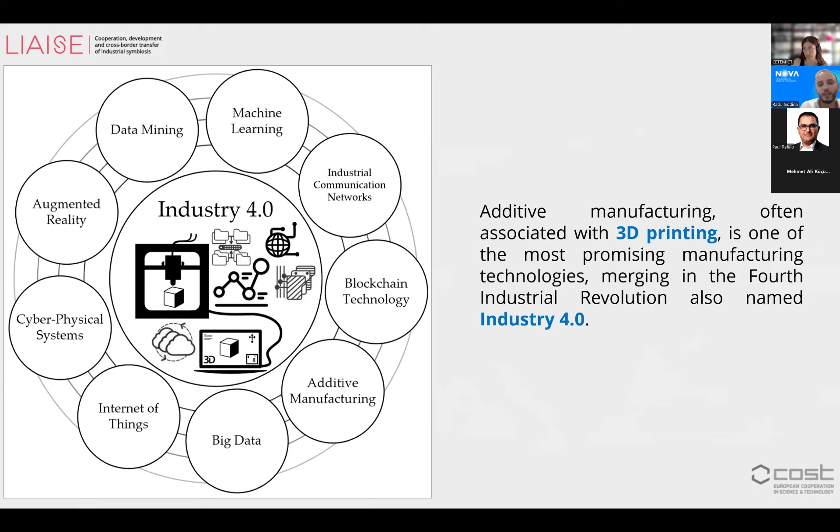It was one of the most promising manufacturing technologies and is closely associated with Industry 4.0. Now, what happens is additive manufacturing has some disadvantages, although in the literature you can find quite a lot of benefits, the disadvantages are not well addressed as often. First, the cost of entry is very high. These machines are pretty costly. The production cost as well, additional materials that are needed.

It is very slow. So if you want to produce a piece that, let's say, is the size of your smartphone, it will take half an hour to one hour at least. And if the volume is even higher than that, it will take even more.

And also there's a need for post-processing. You can see that the surface on these pieces is quite rough. They're not that usable, unless you want to use it as, let's say, a facade element or something aesthetical. Other than that, if you want it to be useful, let's say a spare part in a machine, then it has to be machined and maybe the surface should be treated depending on the use.

This means that it is very slow. Compared with traditional manufacturing, which can produce many pieces per day, this one is quite slower.

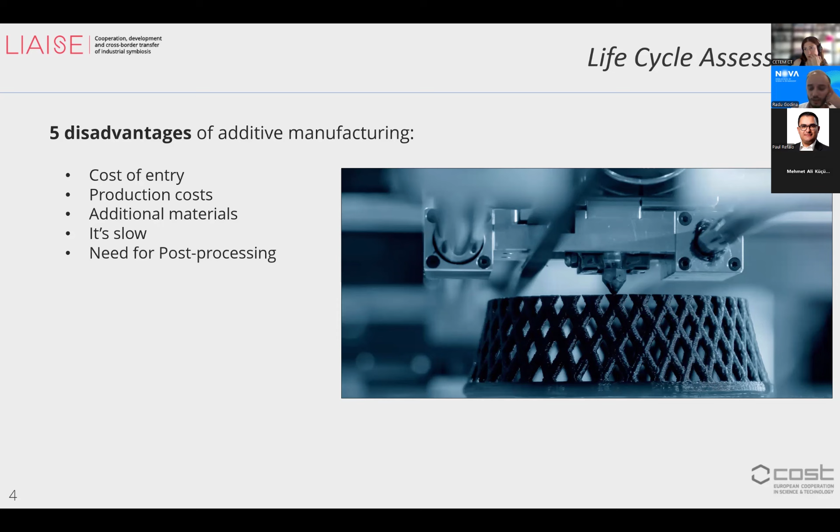There's also obviously benefits. You can quite quickly, when you want to develop new products, accelerate prototyping, you can do a lot of customization. There's energy savings, and many in the research, this is what I want to highlight, address environmental benefits.

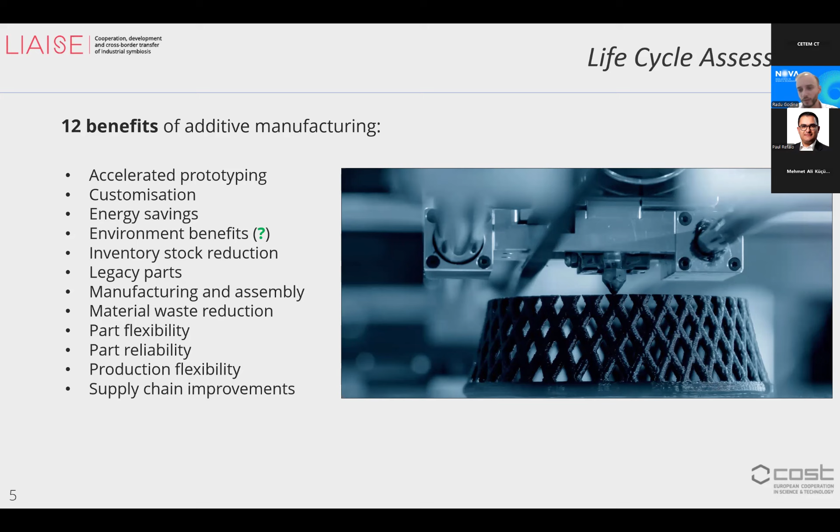We want to say, okay, here is to really test this hypothesis: is it actually really more environmentally friendly to produce via additive manufacturing, specifically wire arc additive manufacturing, or not. There's also more like part flexibility, reliability, and supply chain improvements, and that is something that could also be questioned, depending on the research.

So is this additive manufacturing sustainable? In the literature, you can find the most likely answer will be affirmative. However, often, not always, is the case. So sometimes what can happen is that we need to be careful to actually understand when it is more sustainable. So I'd say yes, in certain cases it is, and we need to find out which are those cases.

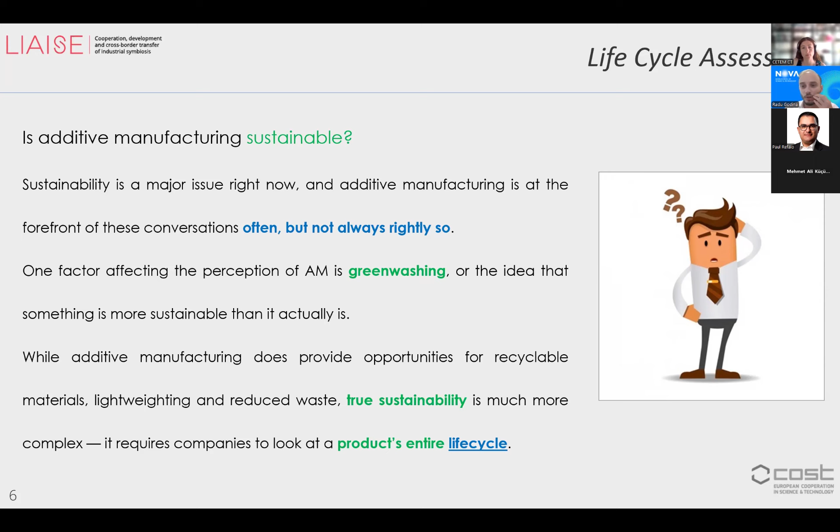So what additive manufacturing provides is opportunities for recyclable materials, lightweighting, and reduced waste. But sustainability is much more complex, and we have to verify the product's entire life cycle. This is exactly what we did, not only for wire arc additive manufacturing, but as well for other processes, because you need to compare it with other additive manufacturing processes.

So, is additive manufacturing sustainable? The answer is more complex. I would say yes, with an asterisk. However, especially in additive manufacturing using all the types of PLA and plastics, there's this Eco-Responsible 3D Printing Alliance that has been started, for example, in the UK.

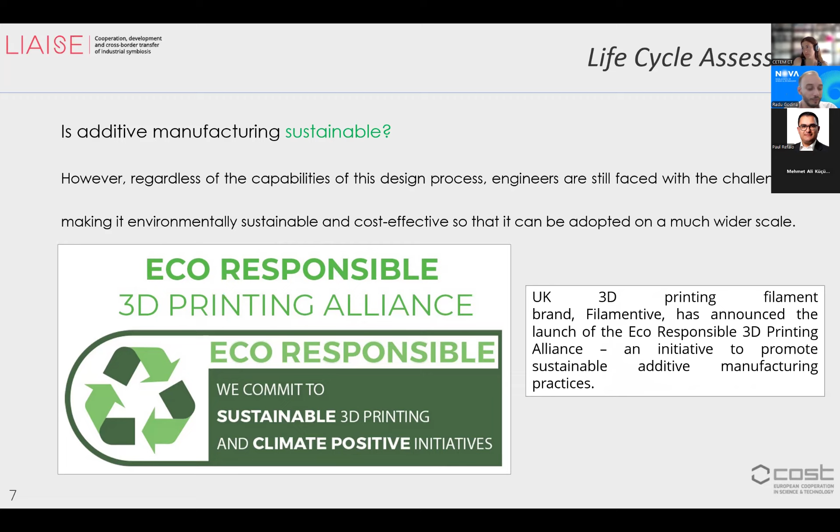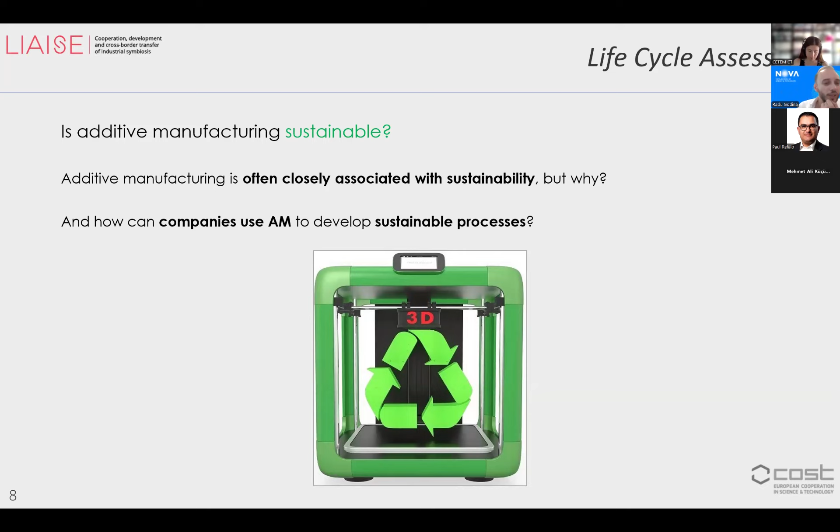The initiative is to promote sustainable additive manufacturing practices, namely where the product comes from, or sometimes implementing biodegradable or recycled elements into the filaments, not entirely coming from fossil fuels. So, however, what we usually associate additive manufacturing with is sustainability. But why? And how can a company use additive manufacturing to develop a more sustainable process?

First of all, we already know all the 17 development goals. What we have here is additive manufacturing and the global goals. You can see that from A to H, there are many benefits from that. For example, workers can benefit through training and education, of course clean production and pollution prevention, with an asterisk of course, and we'll see that case, quality control and standards.

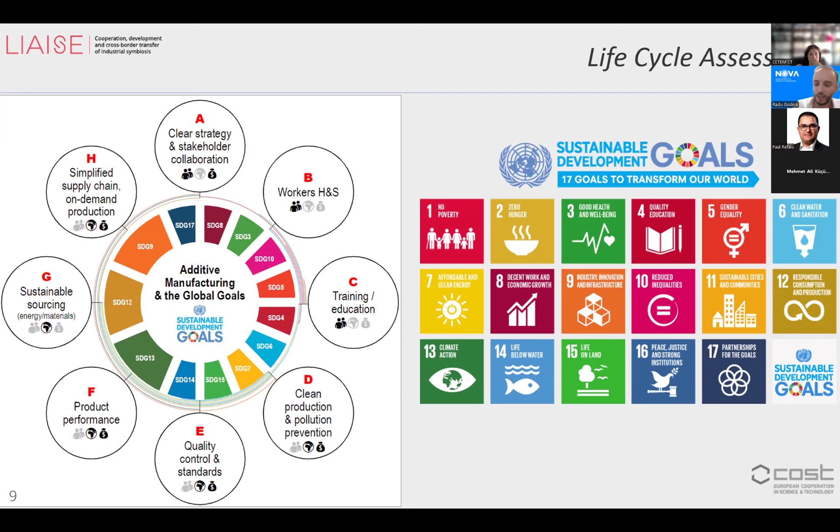Product performance can be higher depending on the situation, sustainable sourcing of energy or materials. We should know, trace and know where it comes from, especially now with the digital product passport from the EU. Simplified supply chains, especially when you have the machine in-house. So if you need spare parts, instead of ordering them from China, you produce them locally. Although even then, you need to make sure where the raw material comes from, in this case where the coil will come from for the WAAM.

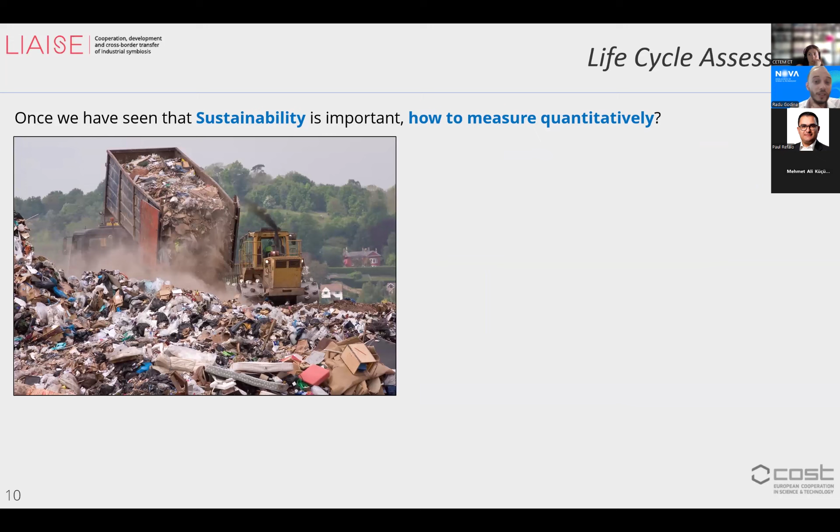So once we've seen that sustainability is important, how to measure it quantitatively. We can see here all the waste that can happen in different situations, and we're well aware of this. And with that, we should use life cycle assessment.

But one does not simply, as the meme shows, do an LCA. It's not as easy as said.

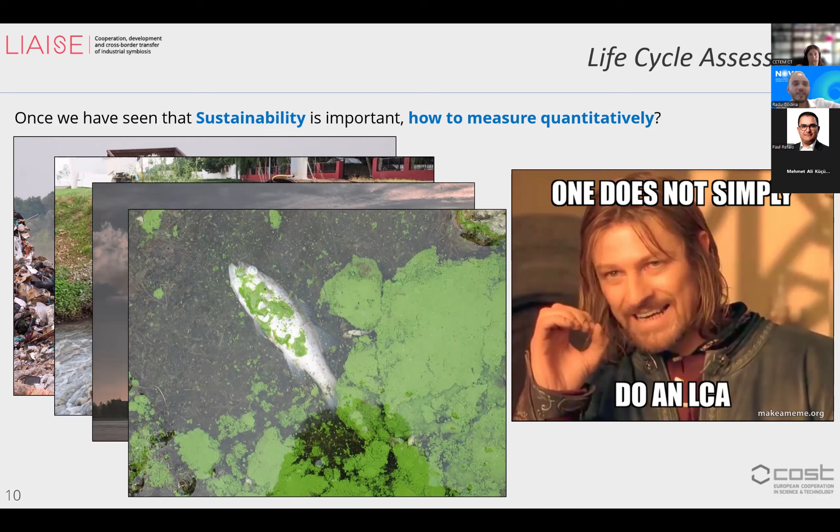Most of you probably know what this is, but I'm going to quickly refresh that life cycle assessment is a methodology for assessing not all, but many environmental impacts associated with all the stages of the life cycle for a commercial product, process, or service. It does a systematic analysis of environmental impact over the course of the entire life cycle, and models the implications of many interacting systems that make up the industrial production. When accurately performed, it can provide valuable data for decision making.

We can see that it can start from material production and go through transportation, manufacturing, transport again, customer use, transport, disposal, or if you want more in a circular economy way, recycling or reuse, and starting from the beginning.

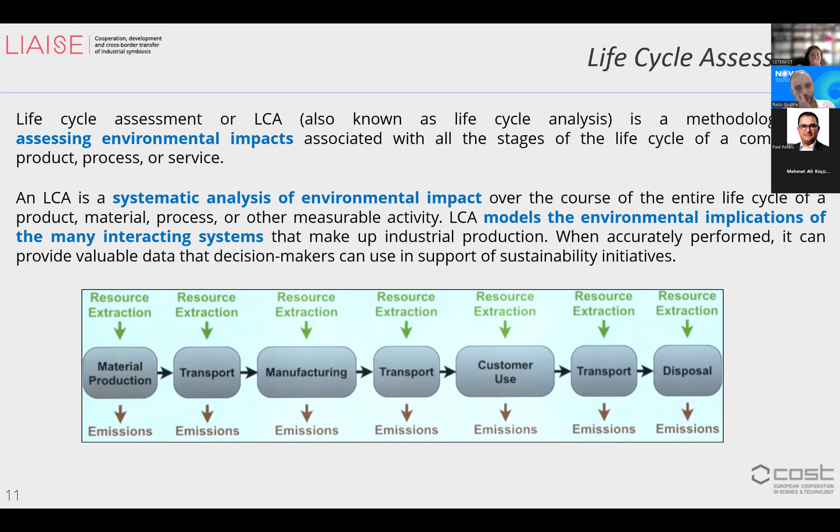So for all of that, you need to quantify all the resource extractions in all of these stages and all the emissions that occur in all of these stages. What we should pay attention to is to not be biased, for example by ignoring transportation, or just focusing on a certain part or section of the production or sequence, instead of evaluating the whole chain.

Life cycle assessment can be done quickly. For example, just a streamlined life cycle assessment to check options, or a fast track LCA to identify the highest impacts and establish some baseline. Or you can use the ISO 14040 standard, and EPDs for the United States.

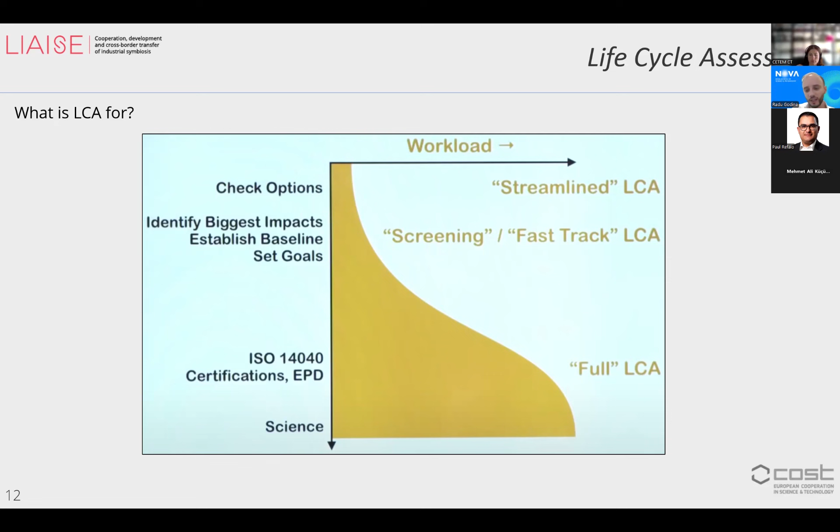In Europe, it's product environmental footprint, PEF. And when you do a full LCA, it takes time. It can take months. So the more into details you go, the more time consuming it is.

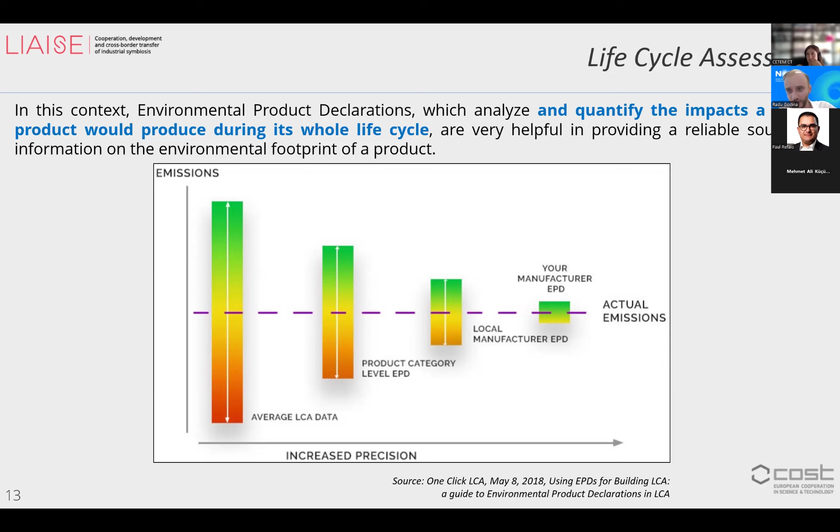However, the more increased precision, the better, the more accurate your result will be, and therefore this will result in better decision making, so you're not ignoring certain elements of the life cycle assessment.

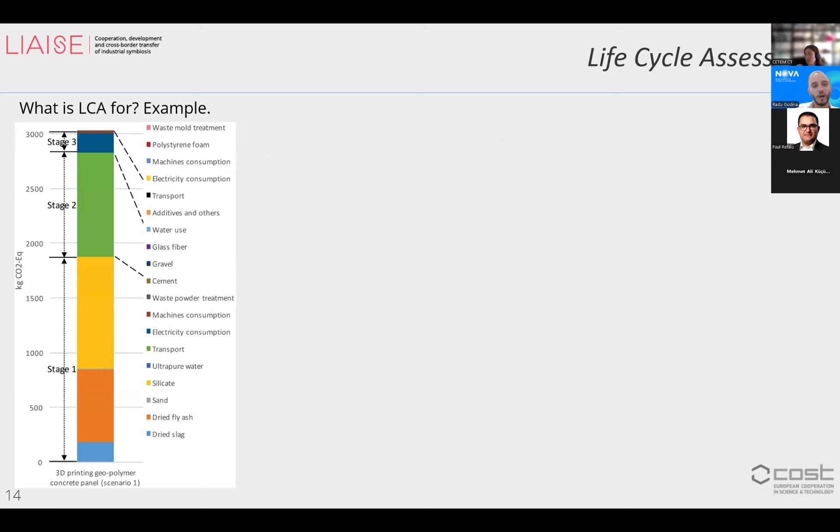So what is a life cycle, for example? In this case, we have a 3D printed geopolymer concrete panel. We can see in scenario 1 what happens, and the question is: is this result bad or good? We have CO2 equivalent, kilograms of CO2 equivalent on the y-axis, and we can see it has all these emissions, almost 3 tons.

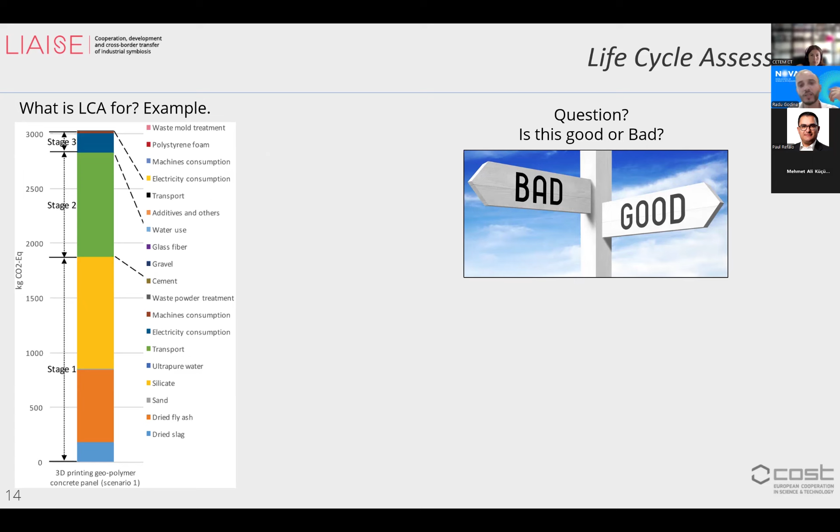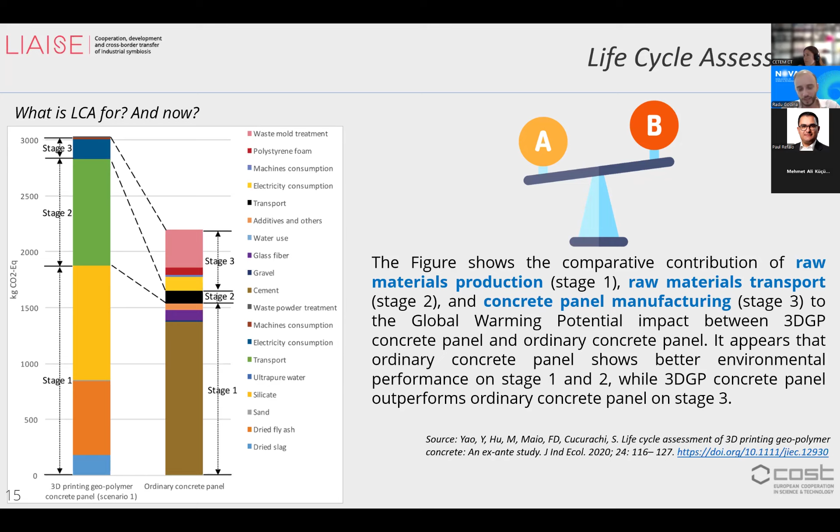Now, when you do an LCA, you need to find the scope of the study: the function, the functional unit, and the reference flow. What are the system boundaries, data categories, quality, critical review, and other procedural aspects.

Then, if something is not adjusted, you go back with interpretation and you select, add, or remove certain parts. Usually you add more detail, then go back and see if the direct application makes sense, and so on and so forth. That's why you do this two-way street interaction between these elements.

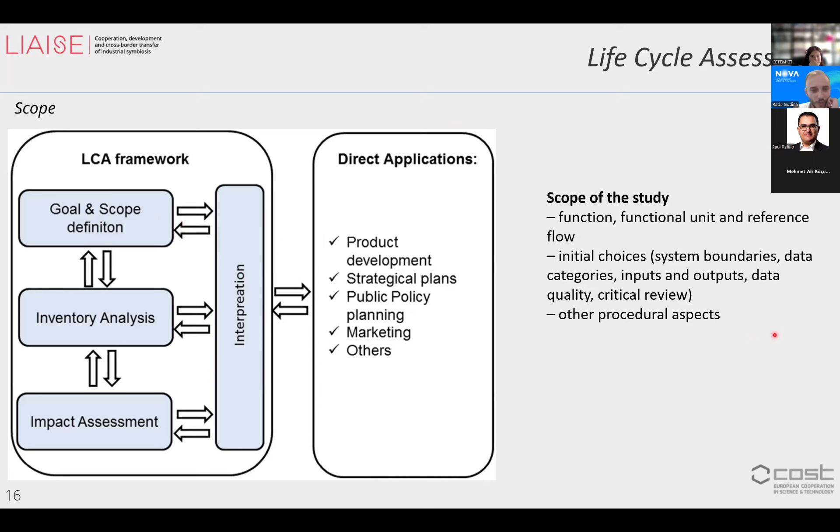Now we need to quickly address what the boundaries are. Some studies, for you to understand, the ones that are the most complete, are the ones that address the cradle to the grave boundary.

This is from the raw material extraction until the disposal, recyclability, or reuse. So it's the cradle, when it's born, until the grave.

When we have cradle to gate, it happens after the manufacturing plant, when it is shipped, until it leaves the manufacturing plant, then it stops there. So it's not taking into account what it will emit after, the transportation, and especially the customer use. Let's say we produce a car, but the customer uses that car for 30 years.

That use is not taken into account if we consider cradle to gate. If we consider gate to grave, it's the opposite. We consider since the customer buys the product until the disposal, and therefore the whole manufacturing part is not taken into account. This is sometimes a phenomenon observed when electrical vehicles are analyzed.

They're analyzed since the... Sorry, Radu, one more minute, please.

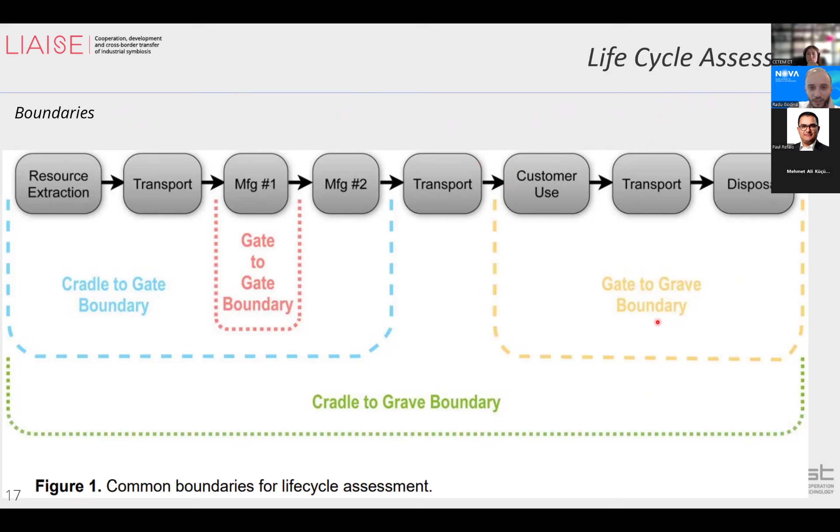One more minute, okay. So I'm going to skip over this because we need to address the WAAM with additive manufacturing in the project. So the additive manufacturing we have here is this.

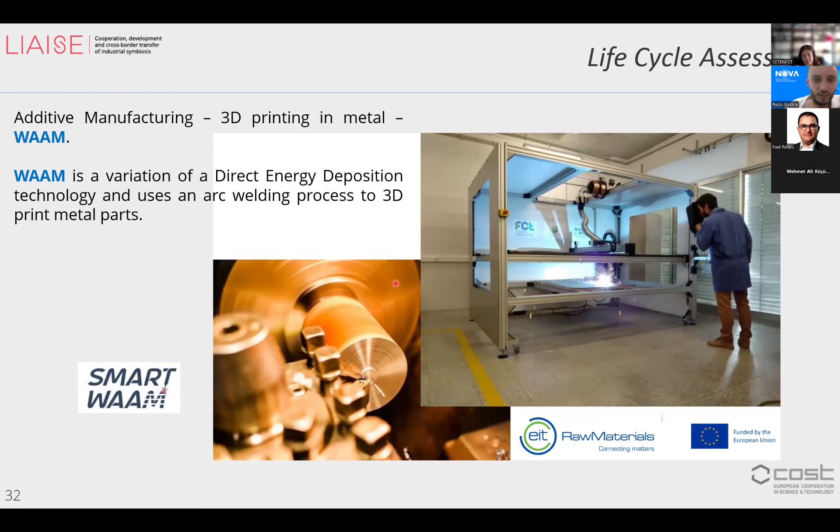You can see here, this is the machine, and it's basically direct energy deposition, very similar to welding. This is the pieces, how they look like. You deposit one layer each time, and then you have to wait a little bit to cool down. When you produce one piece, it kind of looks like this.

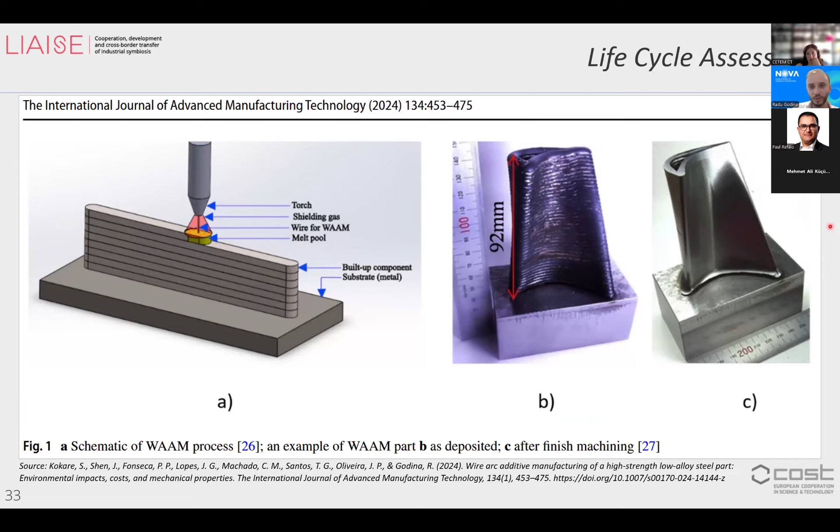Then at the beginning, as I said, you need to machine it and treat it so it will become useful. The comparison was between CNC milling and WAAM.

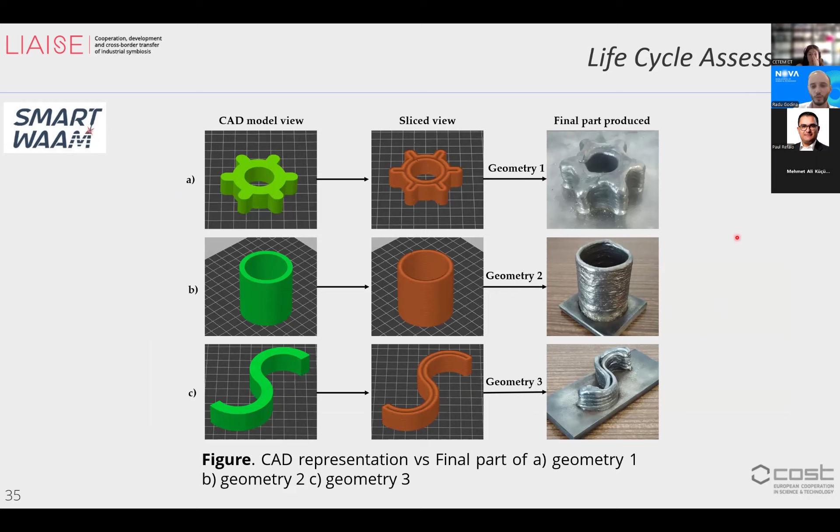These are the pieces that were built, this one and this one. So we have geometry 1, 2, and 3. When they're compared to see not just one type of geometry, because usually all the studies focus on just a wall, this is more complex pieces. We can see that, for example, the environmental impact is much higher on human health than ecosystem and resources for the geometries.

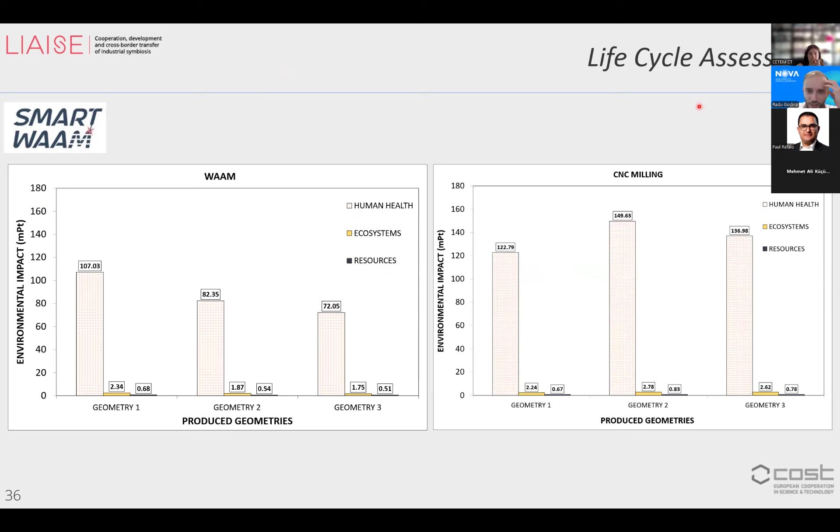We can also see that CNC milling is much higher than the WAAM. When compared with the total impact in millipoints, we see that CNC milling has a more negative impact on the environment for all three geometries, but geometry 1 is quite similar. So we can see that there's a difference depending on the type of geometry.

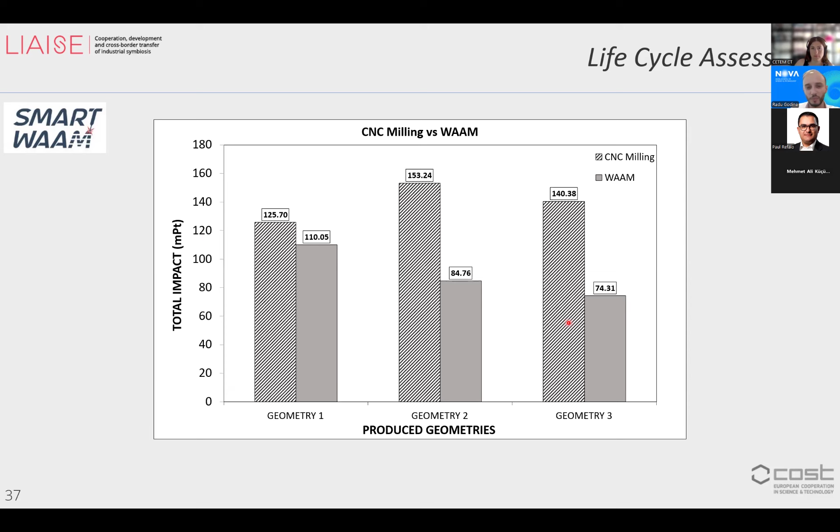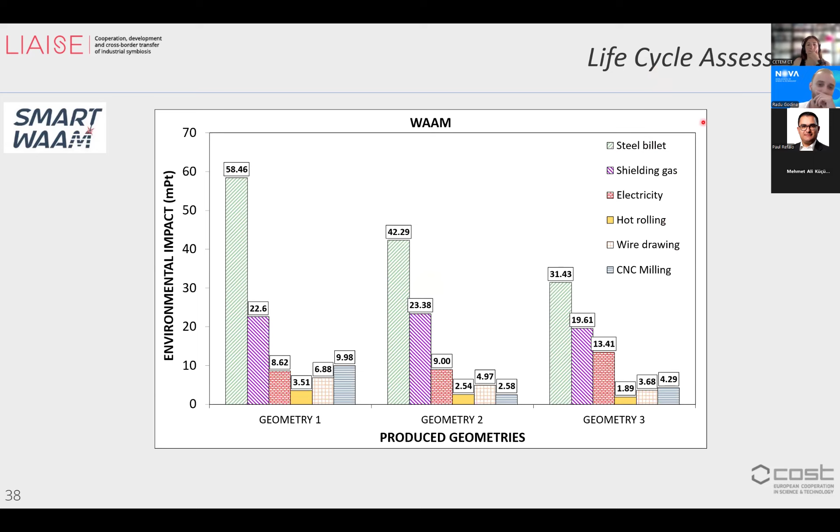Also, the environmental impact divided by the stages of the process, we can see that the steel billet, in both cases, especially now for WAAM, is the one that has the more negative impact.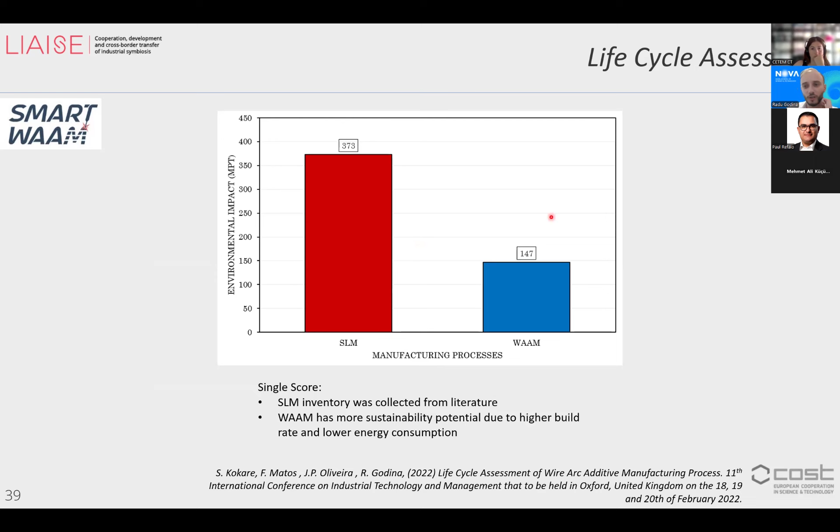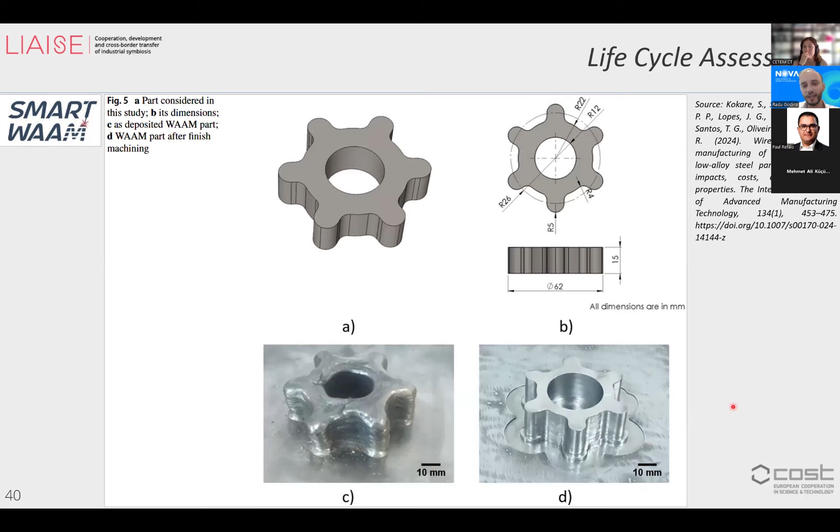This is the piece. You can see that it was then machined after this production. So this is not usable, but after this, and you cut up the base, it becomes usable. This is all the process that was made from the beginning until here, and you can see the end result.

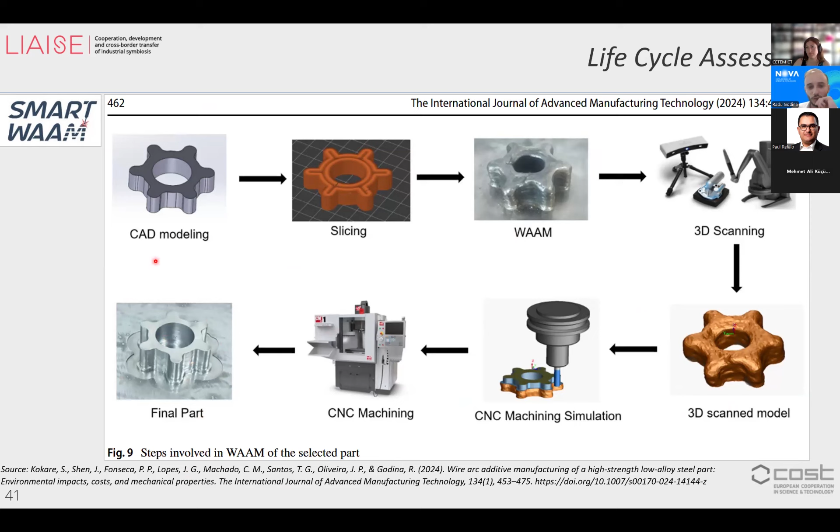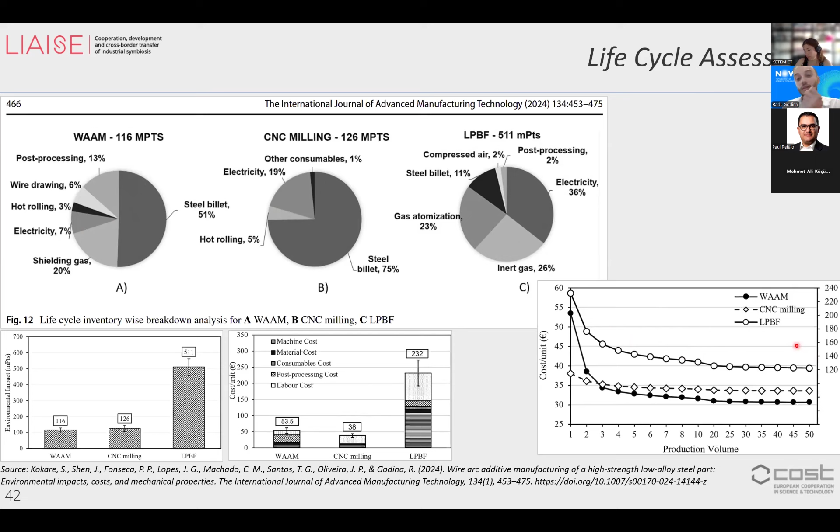And this is also the costs. The costs show that CNC milling tends to be more economical, but again, this is for one piece. Then you augment the volume, and you can see that WAAM becomes more economical.

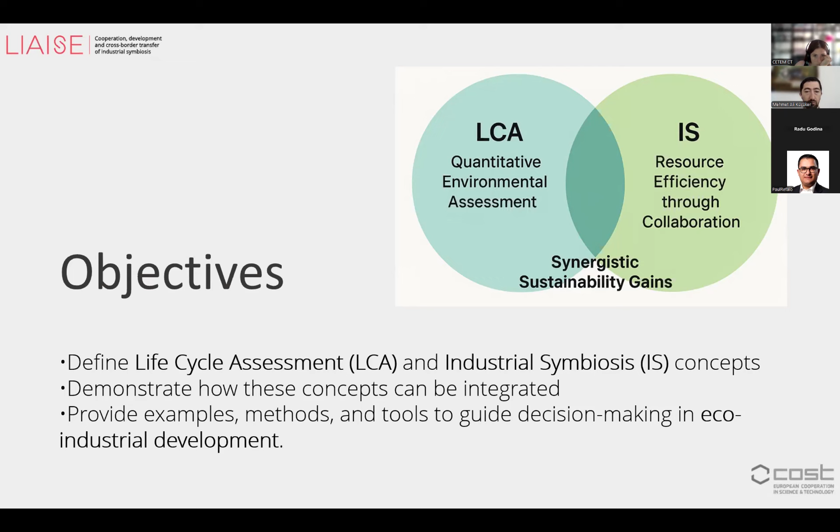So today I will show this integration. Why integrate life cycle assessment? We are witnessing a significant global shift driven by climate targets, including those outlined in the Paris Agreement, which requires deep decarbonization across all sectors.

The European Green Deal and the Circular Economy Action Plan drive policies and market drivers, so we also need a systematic approach for these integrations. Together they offer a structured way to avoid burden shifting, meaning we don't solve environmental problems in one facility only to internalize them in another. Instead, we aim for net systematic gains in sustainability across the industrial network.

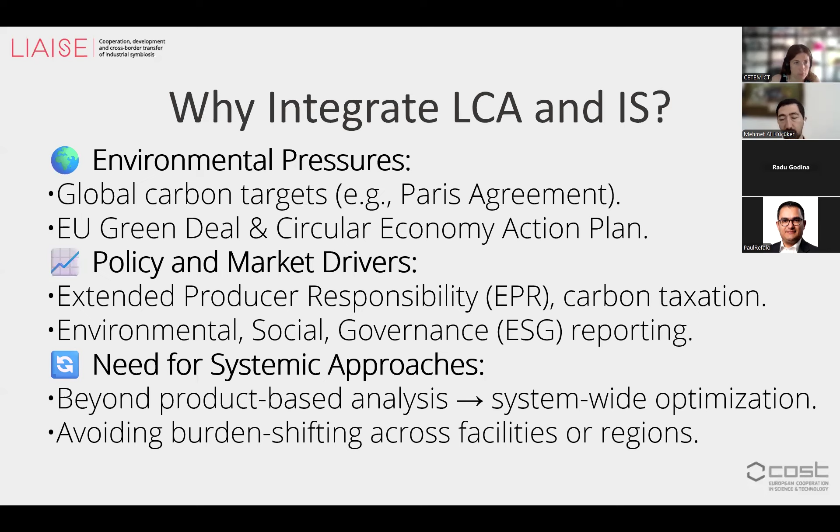When we look at conceptual symbiosis, this diagram illustrates how life cycle assessment and industrial symbiosis are not isolated tools, but are deeply embedded within and reinforced by broader policies and sustainable movements: Sustainable Development Goals, European Green Deal, CEAP, and Fit for 55. Within these, industrial symbiosis plays a central role for these kinds of actions all over the world.

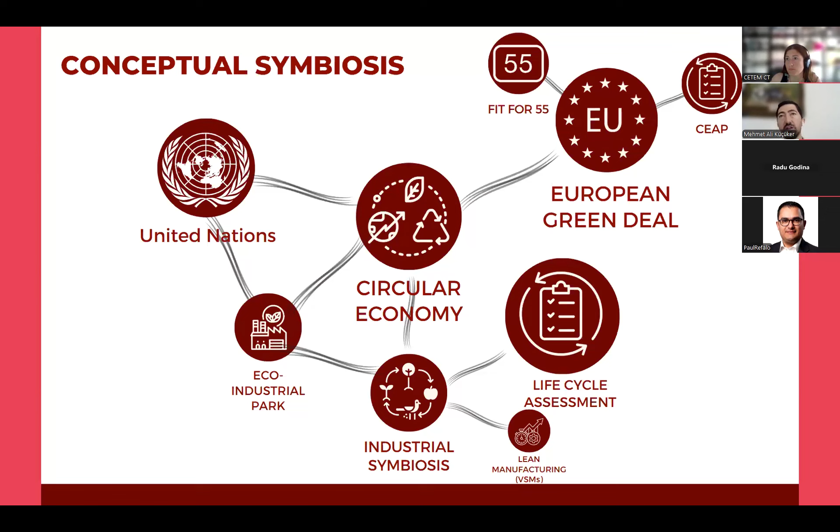To make these synergies scientifically accountable, we integrated life cycle assessment and industrial symbiosis. Life cycle assessment allows us to quantify the environmental benefit of the symbiosis, comparing it with the baseline system to ensure no burden is shifted. I don't want to give more detailed information here.

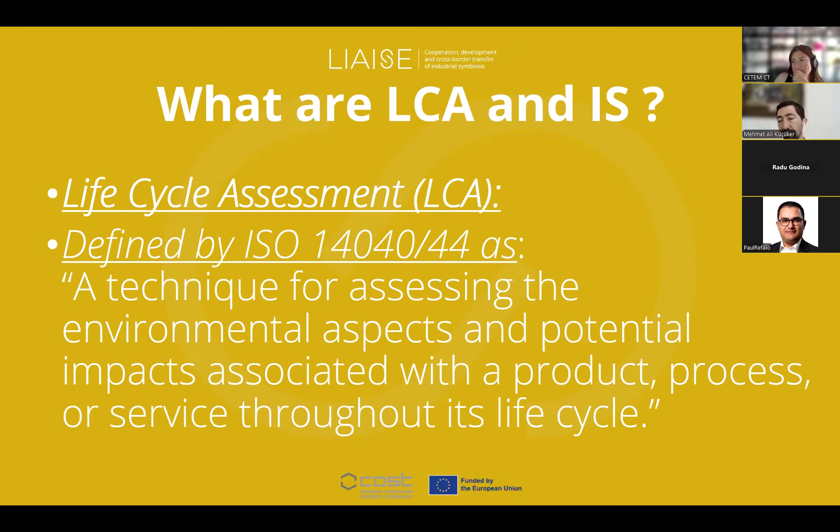As previous speakers have covered, life cycle assessment is a technique for assessing the environmental aspects and potential impacts associated with a product, process, or service. Industrial symbiosis is the exchange of materials, energy, water, byproducts, and knowledge among traditionally separate industries to improve resource efficiency. This is part of the circular economy through eco-industrial parks and frameworks.

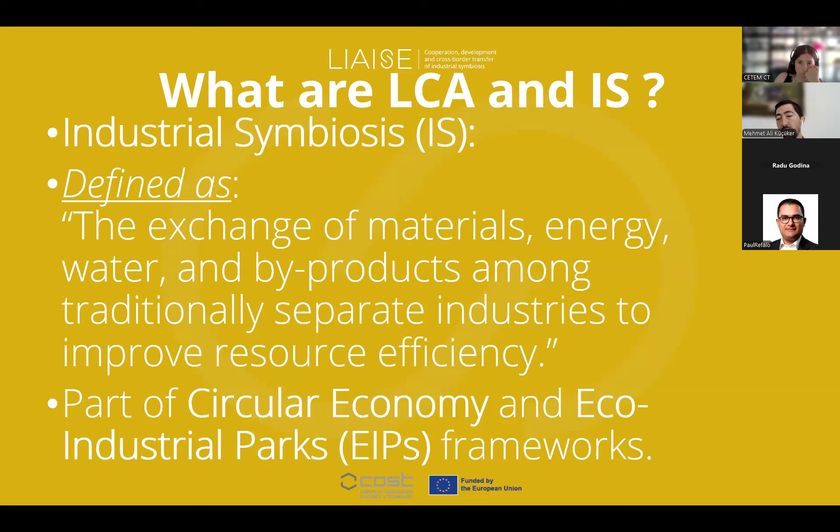Industrial symbiosis is a beneficial tool for the circular economy as well. There are four phases of the life cycle process. First, the goal and scope definition is needed - it begins with this step, followed by the selection of the constitutive functional units.

System boundaries should be identified, and the allocation methods, either mass-based or system expansion, should be given in this section. Also, the life cycle inventory analysis - input and output data are collected for materials, energy, and emissions across all facilities. Then life cycle impact assessment, where impact category modeling and characterization should be defined.

Finally, results and interpretation identify the environmental hotspots, and sensitivity analysis is performed to avoid uncertainty. These lead to target recommendations for optimizing symbiotic flows and minimizing system-wide effects.

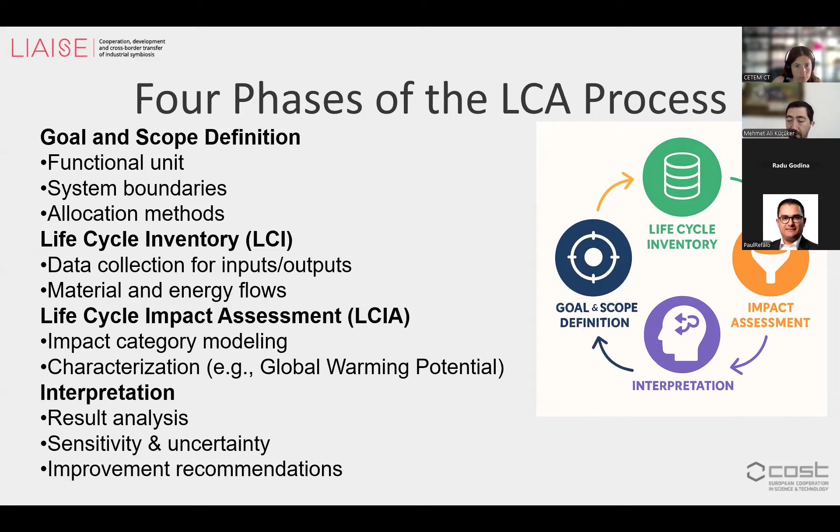Looking at life cycle assessment impact categories, such as global warming potential, ozone depletion, acidification, eutrophication, human toxicity, and abiotic resource depletion, all of them can be defined in national and international standards and methods, which can be really beneficial for categorizing impacts.

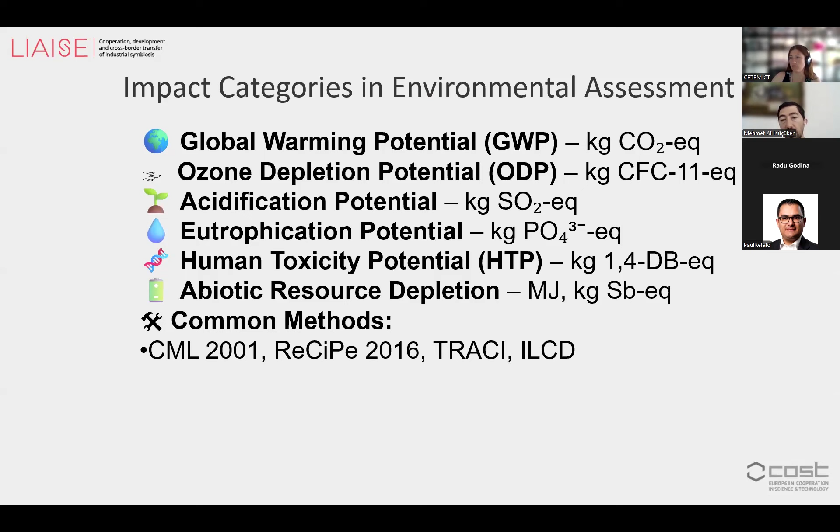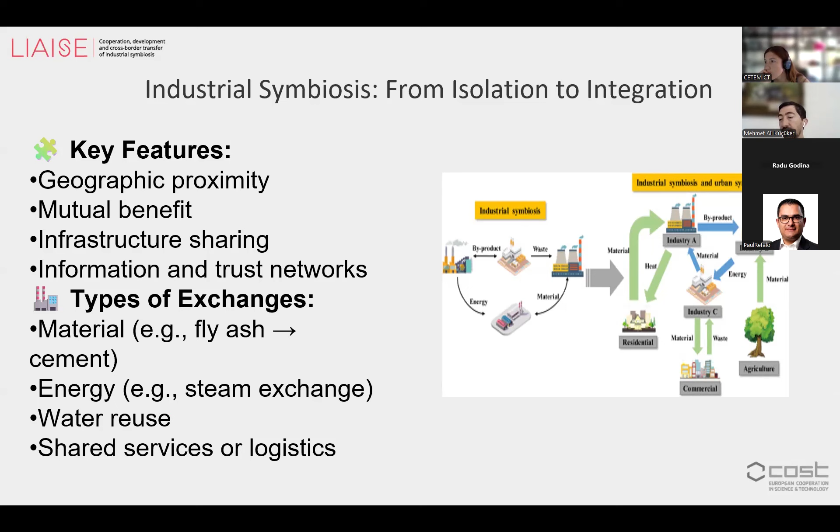When we look at industrial symbiosis from isolation to integration, successful symbiosis relies first on geographic proximity, which reduces the cost and complexity of material and energy exchange. Mutual benefit is essential, along with infrastructure sharing, trust-based information networks, material reuse, energy integration, water recycling, and shared logistics. Together, these practices support the creation of eco-industrial parks and the circularity of regional scales.

When we look at the step-by-step methodology for life cycle assessment of industrial symbiosis, the goal is to compare the environmental impacts of two configurations: a conventional baseline and an industrial symbiosis integrated system. Depending on the study purpose, either an attributional or consequential modeling approach is selected.

Attributional modeling reflects current average conditions, while consequential modeling assesses the effects of system changes. Functional units and functional flows should be defined during this method as well.

In terms of system boundaries, there are three standard boundary systems: gate to gate, cradle to gate, and cradle to grave. In the context of industrial symbiosis, the system boundaries must be expanded to include all relevant exchanges, not only internal operations, but also the flows of materials, energy, water, and emissions that move between facilities.

The next subject is allocation with multiple outputs, which is necessary when a process yields a main product and one or more byproducts. Mass-based, economic allocation, and system expansion or substitution methods can be used, with substitution preferred in industrial symbiosis. These methods credit the system for avoiding the production of a conventional product, for example when biogas replaces fossil natural gas.

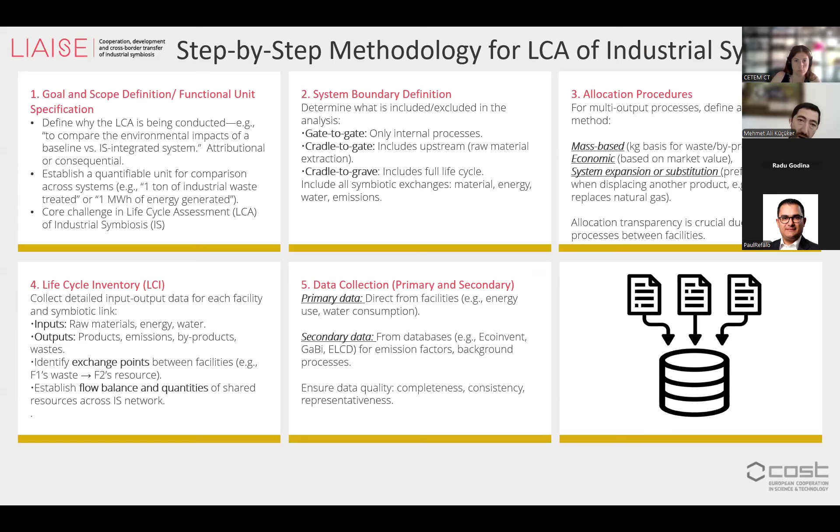We also focus on flow diagrams to represent both the baseline and industrial symbiosis scenarios, which is crucial. The objective is to visualize the quantity and direction of material, energy, and water flows between facilities. This includes both direct resource exchange and utility-level interactions. Examples of utility exchange include flows of biogas, carbon dioxide, or steam between facilities.

This mapping process is essential to identify environmental benefits, trace emission pathways, and prepare for the impact assessment phase of the life cycle assessment. We also use these flow diagrams—value stream diagrams can be utilized for lean manufacturing as well.

Emission factors serve as quantitative conversion parameters that translate the input and output data. This is very important.

The interpretation of results is another part of life cycle assessment. First, hotspot analysis is performed to identify which processes or exchanges are the major contributors to each impact category, which helps prioritize improvement efforts. The next step is to compare the baseline and industrial symbiosis scenarios, where data gaps can also be identified.

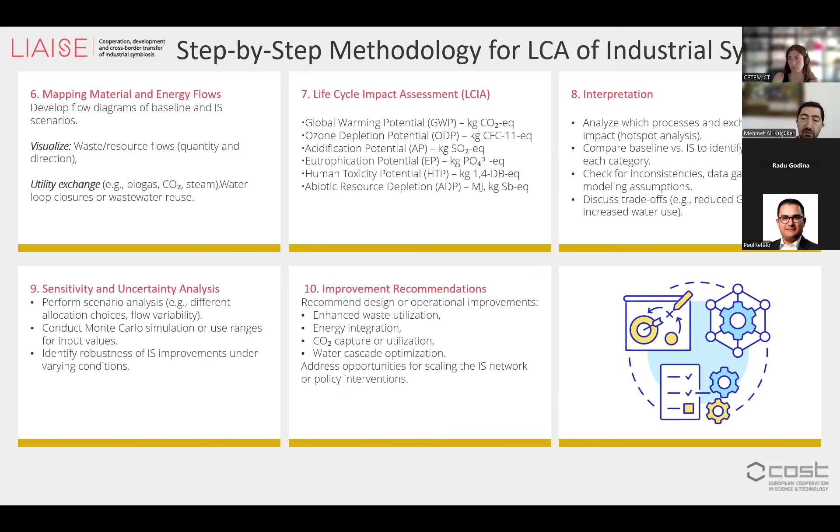So when these tools are integrated, the benefits are multiple. Integration allows for cross-sectoral optimization and quantification, and trade-offs the ability to translate symbiotic opportunities into data-driven sustainability strategies.

So how should researchers and practitioners move forward? For researchers, there is a clear need to develop dynamic life cycle assessment frameworks that reflect the evolving nature of symbiotic networks.

For industry or planners, life cycle assessment should be used as a decision support tool to prioritize industrial symbiosis scenarios based on impact reduction potential.

This system should promote the development of open access industrial symbiosis and life cycle assessment databases to ensure widespread application and equity in sustainability planning.

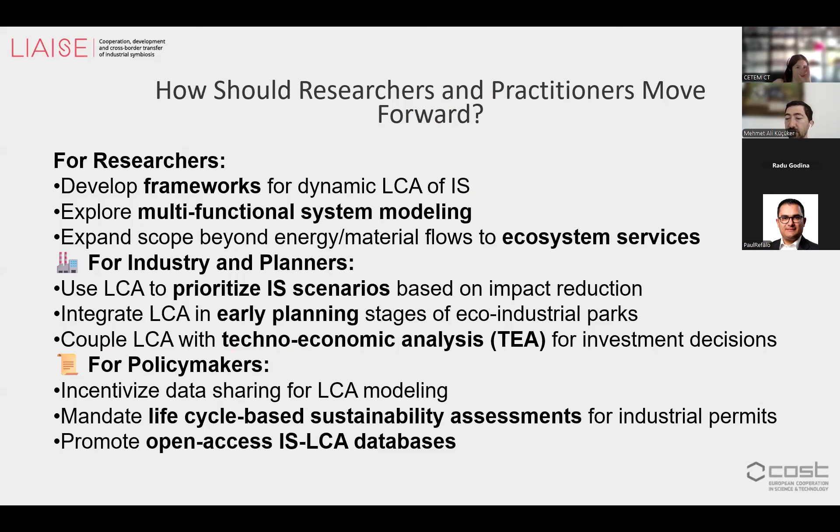So the integration of these tools is both powerful and necessary. For the future, quantification through environmental metrics and practical implementation of sustainability strategies are mutually reinforcing.

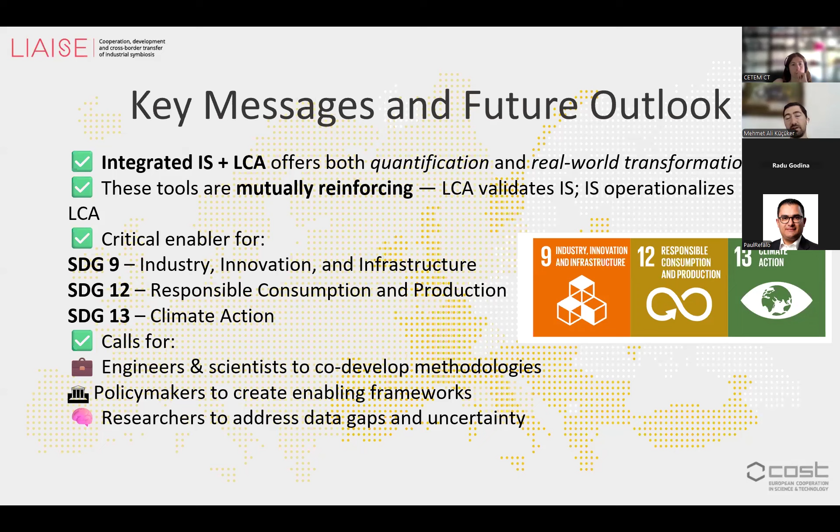Engineers and scientists must co-develop methodological frameworks. Policymakers must support the integration through regulations and incentives, and researchers must fill the critical data and modeling gaps. Thank you very much for all of you joining us during this presentation.

Thank you, Almudena, for the invitation to deliver a presentation in this webinar. I am Paul Refalo from the University of Malta, and I will be presenting how we're using life cycle assessments in our projects, in our research, to assess and decarbonize various products and systems that we are working on.

Just a brief introduction. When we design for sustainability, there are various ways of how we think about it from a sustainability perspective. We design for the three pillars: the financial, the social, and the environmental. We should be using systems thinking, so we shouldn't just focus on one element at a time, but look at the whole system concurrently.

And we should also be using life cycle thinking, looking into how the products, the systems, the processes we are using would evolve throughout their whole life cycle. In that sense, we use life cycle thinking for products to see how they go through the different life cycle phases.

As the previous speakers already mentioned, life cycle thinking goes through each and every phase: raw material extraction, manufacturing, distribution, use, and end of life. Ideally, we design products and systems in a way that closes the loop.

Here we're in a webinar organized under the COST Action targeting industrial symbiosis, so we should be looking into how to close the loop and create a circular economy. Many of the products, many of the systems that we design, unfortunately, end up going to the landfill.

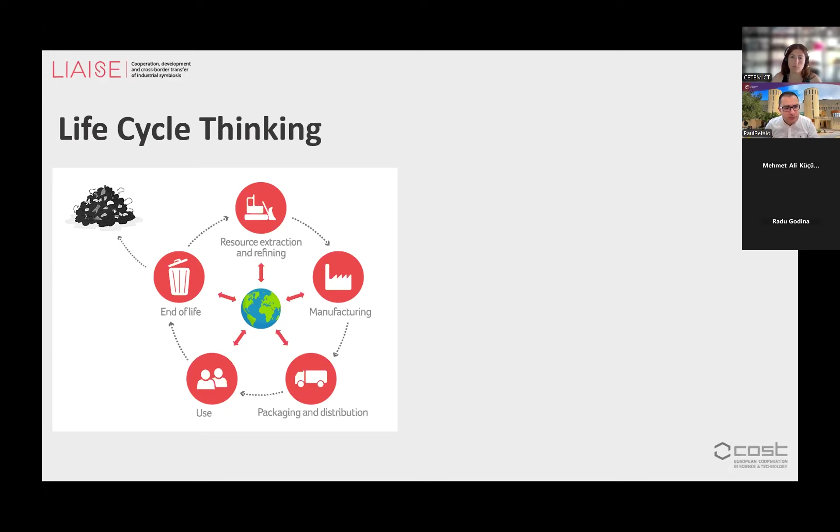So ideally, we see how to close the loop. Life cycle assessments can help us do this, can help us assess and compare, as Radu and Mehmet already highlighted, to compare the various environmental impacts quantitatively over the whole life cycle, depending on the boundaries that we set in our life cycle assessment.

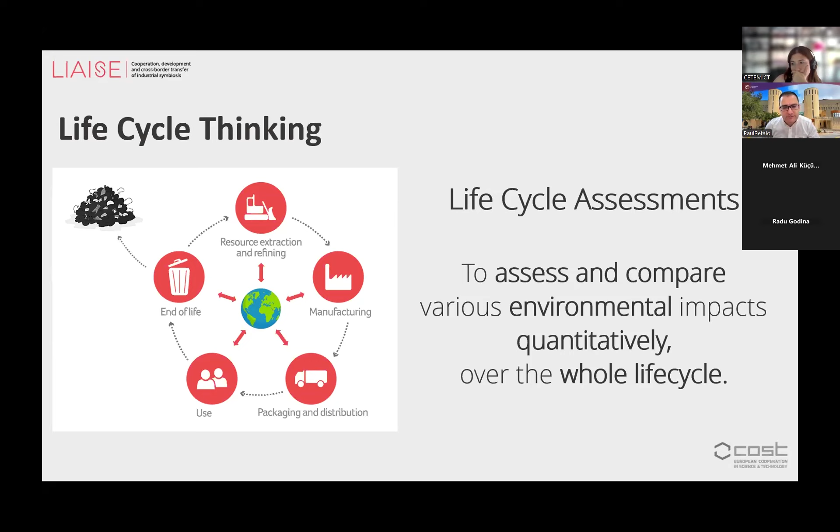And what I'm going to do is show you how we used life cycle assessment in various projects to assess these environmental impacts, starting off with a project which we had in collaboration with a company called Toly Products. Toly Products produce packaging systems for makeup brands.

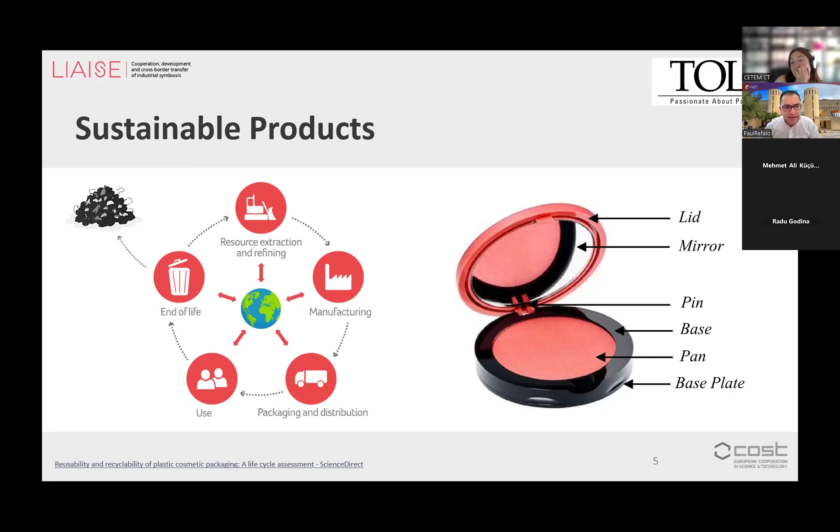So their customers include Dior, Chanel, Sephora, and all those brands. And one of the products which we used as a case study was what you're seeing here on the screen, a compact for this powder. Toly Products asked us to look into various initiatives which they could take to decrease, to minimize their environmental impacts, particularly, obviously, the carbon footprint, the global warming potential.

So we carried out various scenarios to be able to compare with a benchmark, and we compared these various scenarios as I'm going to explain.

So we started off with this scenario one, which is the benchmark, but we also considered using different polymers, different plastics. We started off with ABS, which was their material back then, and we saw if we had to shift to different polymers, what the environmental impact over the whole life cycle would be. So we considered polypropylene, PET, PLA, and a wood polymer composite.

What if we had to get 100% renewable energy for our plants? What if we had to decrease the energy consumption in our manufacturing plant by 50%? What if we had to create a circular economy where the customers would simply return the packages, so those materials could go into a scenario of 100% recycling at end of life?

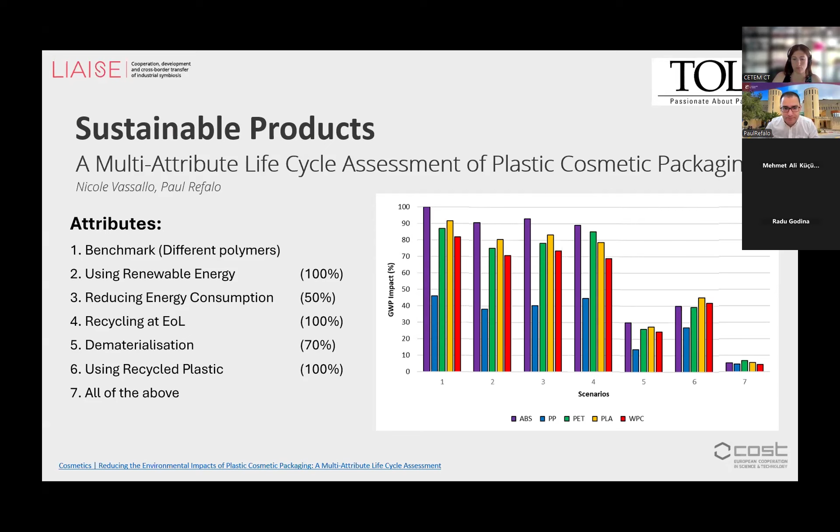Another project which we also used the life cycle assessment for was the MicroWatTS project. The MicroWatTS project was funded by Interreg, the Interreg Italia-Malta protocol.

And in this project, we designed a wastewater treatment system which recycles grey water coming from wash hand basins, sinks, showers, baths—so wastewater coming from personal hygiene—treats it using ultraviolet and photocatalysis, and then uses it as second-class water for toilet flushing.

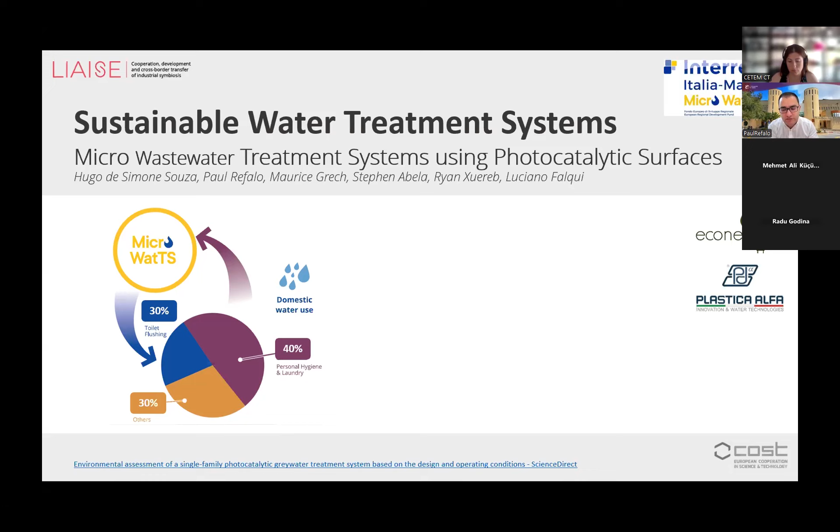So we had a system which could reduce the water footprint by 30%. This is the system which we had designed. Obviously, saving 30% of the water consumption is obviously a good thing.

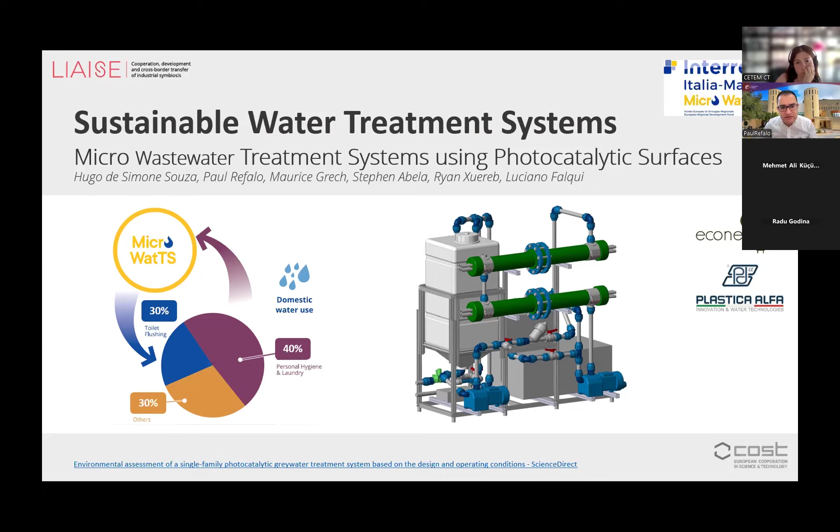But what we wanted to do was assess whether this system—using ultraviolet, using all the components, all the photocatalytic materials, the pumps, the fittings, and all the resources over the whole life cycle—we wanted to see whether this is actually beneficial from an environmental footprint perspective or not.

So again, we carried out a life cycle assessment for all the life cycle stages, and we compared the grey water system which we designed with the baseline scenario, the municipal scenario where we get town water and use it for toilet flushing, and that water then goes to the wastewater treatment plant.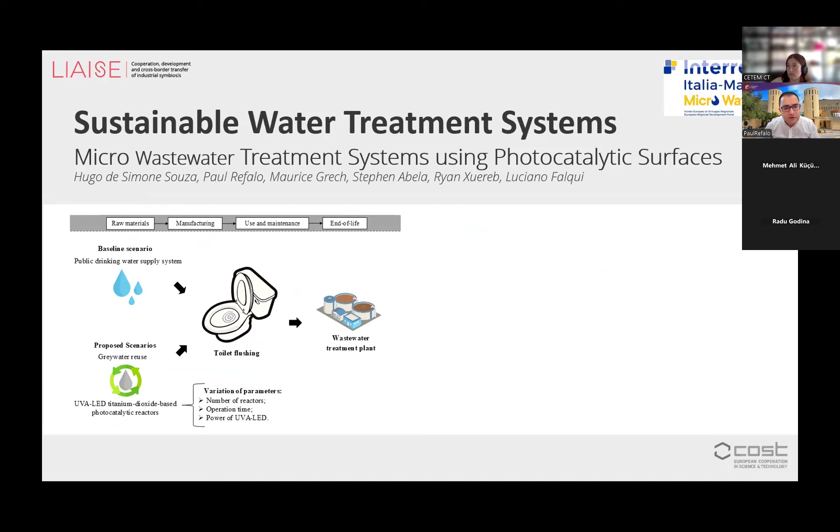We started off by assessing the carbon footprint for Malta. The majority of our water comes from reverse osmosis, since our country lacks freshwater resources and we rely on around two-thirds of our water coming from energy-intensive reverse osmosis. We established that baseline, the benchmark, the datum, at around 4 kilograms of CO2 per cubic meter.

Then we varied various operational parameters in our developed system: the number of reactors, the operational time it would take to treat the water, and the power of the UV in the reactors. We saw there are situations where using the system would in fact not be beneficial - if these operational parameters result in a carbon footprint higher than 4 kilograms, then the water treatment system, although it saves water, is not environmentally feasible.

So in this case, we used life cycle assessment as a design tool to make sure that if we had to design and develop this system, we want operational parameters which would reduce not just the water footprint, but also the carbon footprint - coming up with not just a system which saves one resource.

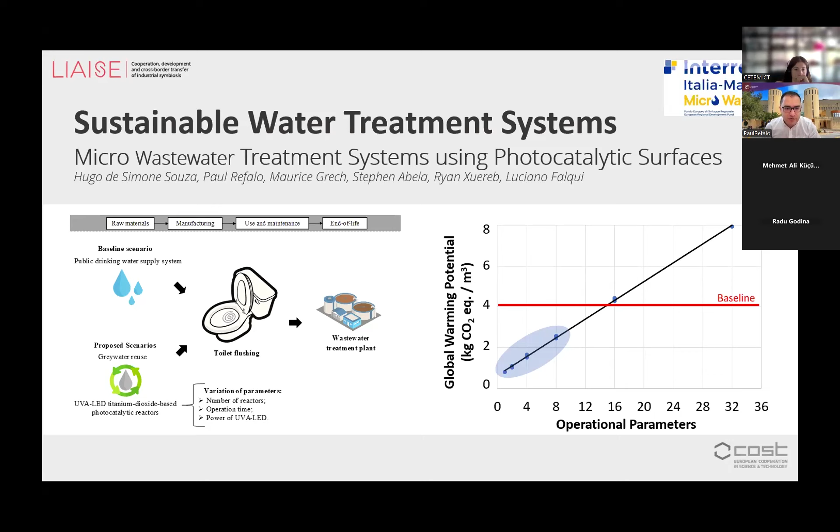One last project and system which we also assessed using life cycle assessment relates to compressed air systems. Compressed air is one of the main utilities found in industry and factories, and it is one of the most energy intensive processes. It is widely used mainly for automation and various other processes.

However, to add insult to injury, around 30% of this compressed air is lost to leakages - you'd have compressors just generating compressed air which is lost. We estimate that these losses in the EU contribute to around 7 million tons of carbon dioxide.

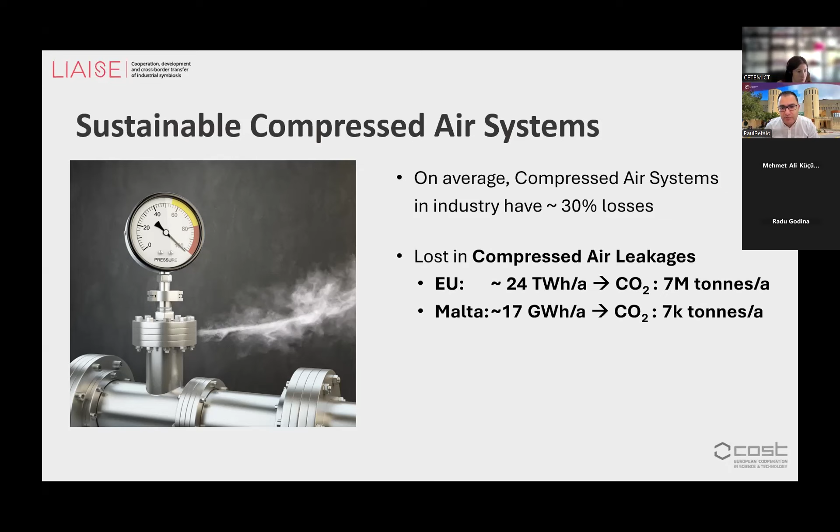So what we did is we used national funds coming from Xjenza Malta. We partnered with AIM Enterprises, and we also had ST Microelectronics, Toly, and Methode Electronics as industrial partners.

We developed a system which uses industrial Internet of Things and artificial intelligence to autonomously monitor and control compressed air systems. We came up with a system which identifies and classifies whether you have leaks and tells you how big these leakages are, then offers an intelligent control solution.

So not just telling you that you have leaks, but also mitigating them, not at the expense of productivity. This system works on the demand side of the compressed air system, not on the compressor, but on where the demand actually is in real time.

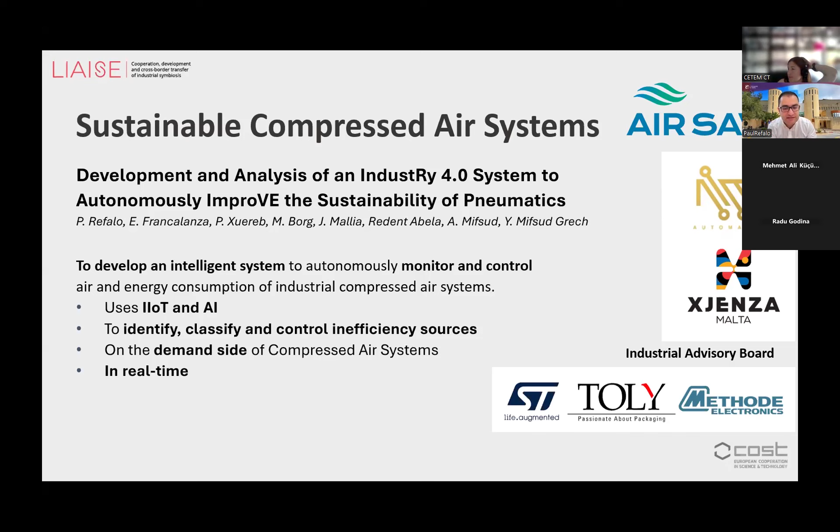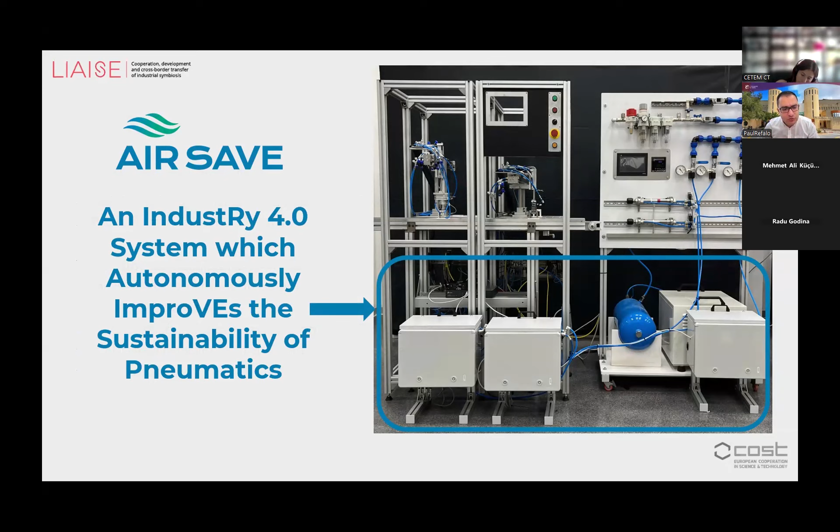This is what the prototype we had in the lab actually looks like. We developed various sensors, actuators and controllers which could be used to pinpoint and control leakages in real time.

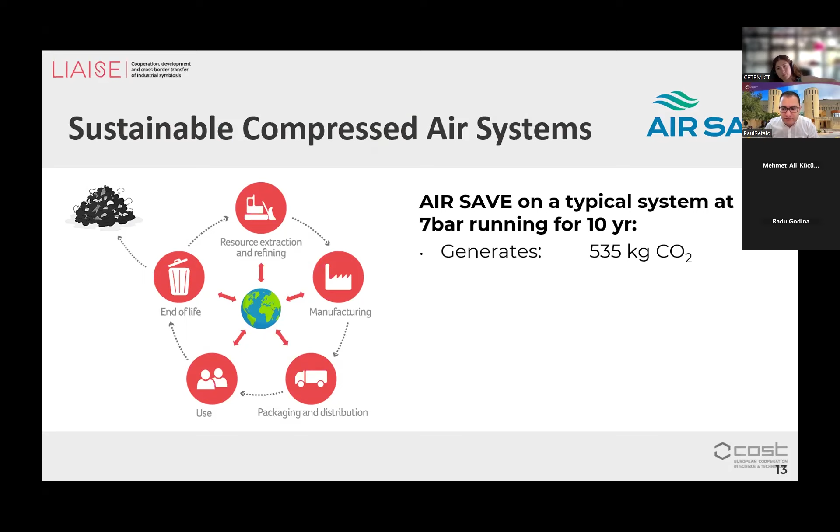We carried out a life cycle assessment on the extra actuators and sensors we are using, and established that our system generates 500 kilograms of CO2. However, on a system running at 7 bar for 10 years, this has the potential to save over 9 tons. So even though it's a system that reduces energy consumption by a potential 30%, it has an environmental payback period of less than 3 months.

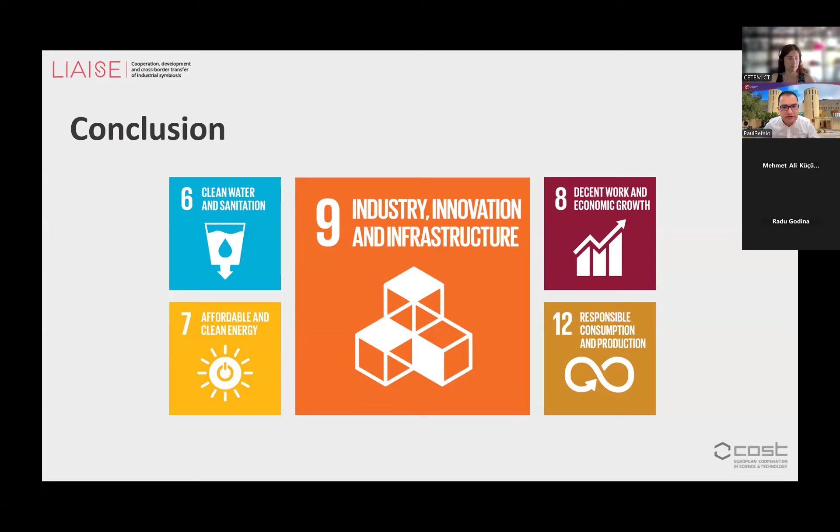So in this case, life cycle assessment showed us that it would not just save energy, but in the long term, it would also be environmentally feasible. So I just showed you 3 examples of how we used life cycle assessment in our research, in our design, when we're designing projects, processes and products, mainly targeting SDG goal number 9, and also targeting other goals on water, energy, and production among others.